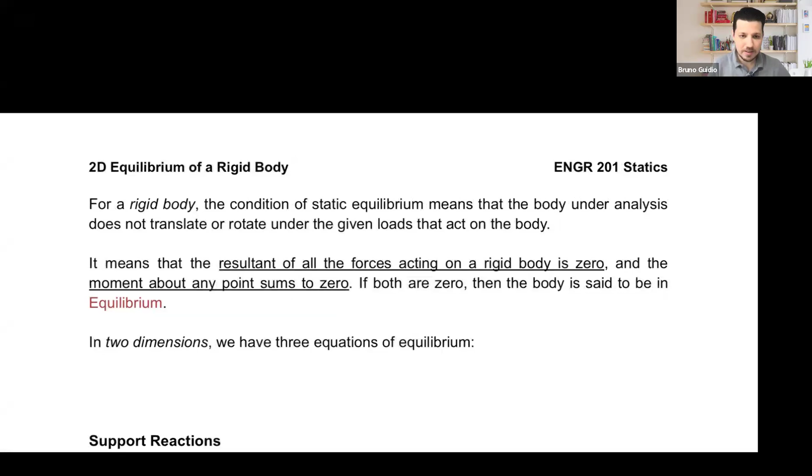Once again, this lecture is going to be on the midterm. This is an important lecture to wrap up the last two weeks that we have been together.

Okay guys, so we have been talking about 2-dimension, 3-dimension moments. Oh sorry, equilibrium.

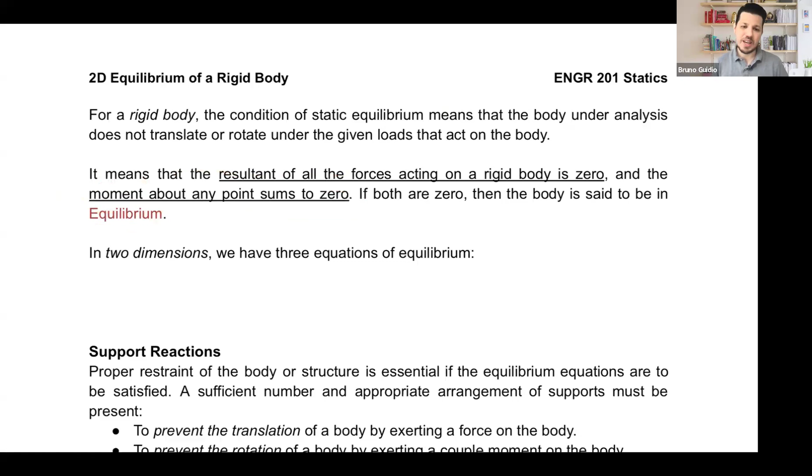And we're going to work with 2 dimensions—let's bring the equations back. Sum of the force in x should be 0. Sum of the force in y should be 0. Those are the two equations we have already worked with when talking about a particle. But now, what do we have? Sum of the moments about a point should be 0. Which point is this moment point, this point O? Any point—any point that I pick on my rigid body, once I calculate the moments, it should be 0.

Now, guys, before we start solving problems, think about this—I have this calculator right here. What's going to happen once I apply a force? If I don't have anything to hold it, once I apply the force, it's going to rotate. So I just said that to be in equilibrium there is no rotation, no translation, no force acting, no movement. So what I need to do is have some support, some grip here—something to hold this calculator. So once I apply the force, the calculator will not move.

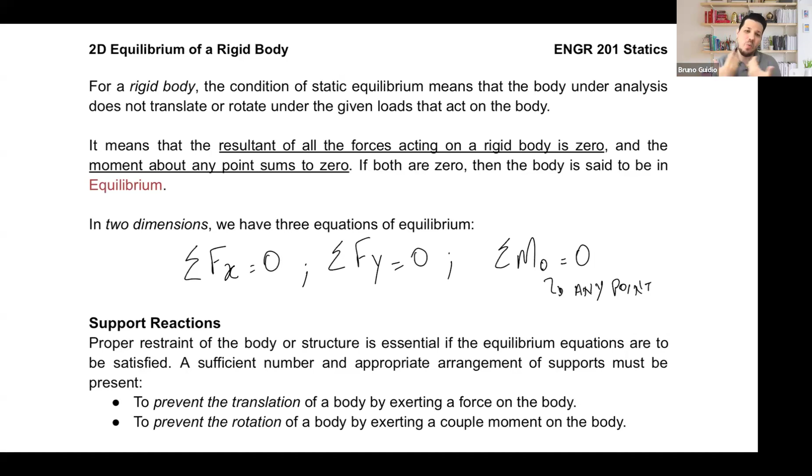And what are those legs? What do we call them? We call them supports. So for those equilibrium equations in 2 dimensions and the rigid body, 2 dimensions, 3 dimensions, we have what we call support.

And those supports, they're gonna cause some reactions. Action, reaction. If I have my weight on the table, the legs are gonna work, they're gonna react to my force. I put some force down, they're gonna react to it. I'm gonna put some force up. So it's gonna be kind of a fight, myself pushing it down and the legs pushing up. So that's what we have in those problems.

In order to maintain the equilibrium in 2 dimensions or 3 dimensions for a rigid body, we have some supports. For example, the beams. The beam is right there, and what's giving support to the beams? Most of the time, columns.

The airplane - what is giving the support to the airplane when he's down on the road on the airport? Well, the wheels. Same thing for cars. All right, so we have some support.

If I take, we're gonna have probably time to do a problem here. If I take a ball, a weight, and I'm holding this ball, why is it keeping my arm from going down? Well, it's the force that I'm doing, but who is doing this force? It's a reaction against the weight of the ball with my muscle - my arm here, muscle, tendon.

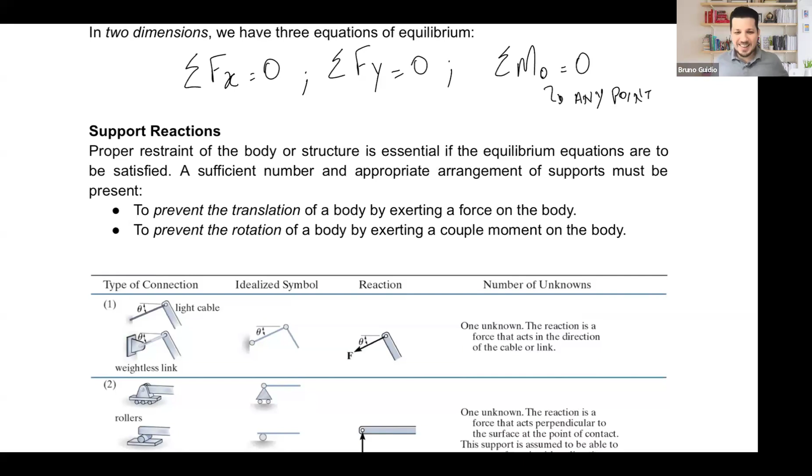So we have some reactions, support reactions, that we call support reactions. Depending on the support, they're gonna give different reactions. Some of the reactions are gonna prevent translation - prevent you from moving right, left, up, and down. Another is gonna prevent rotation - rotating clockwise, counterclockwise, both directions.

So our job when we start these kinds of problems today, first thing we need to figure out is what are the support reactions, or what kind of support I have, and which reactions that support will bring to the problem. For example, I have here a list of the most common ones that we're going to find. Let me go here with you.

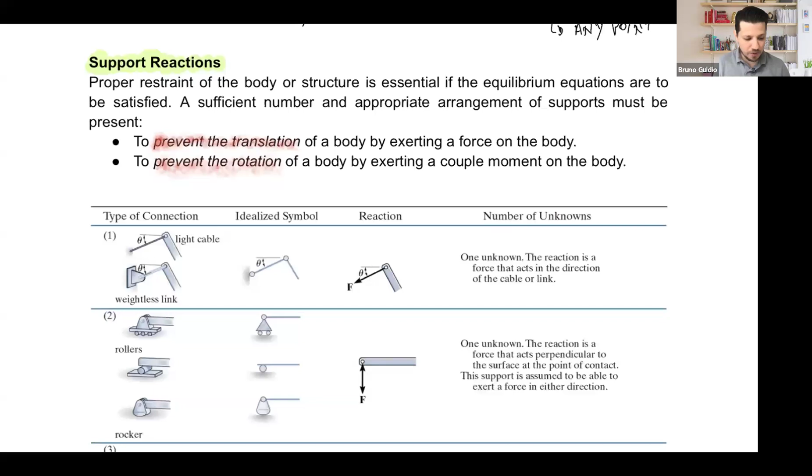This first one - sometimes we can have this light cable, or a link. And what are the reactions that we have? Well, we're gonna have a reaction right here. That link is just one unknown. The reaction is a force that acts in the direction of the cable or the link. That's pretty much what we had in the particles.

We have cables, and we call that reaction what? Tension. So the cables are gonna bring tension, and that's what we did. The tension here is gonna hold that one in order to not move. So that's pretty much what we did in particles.

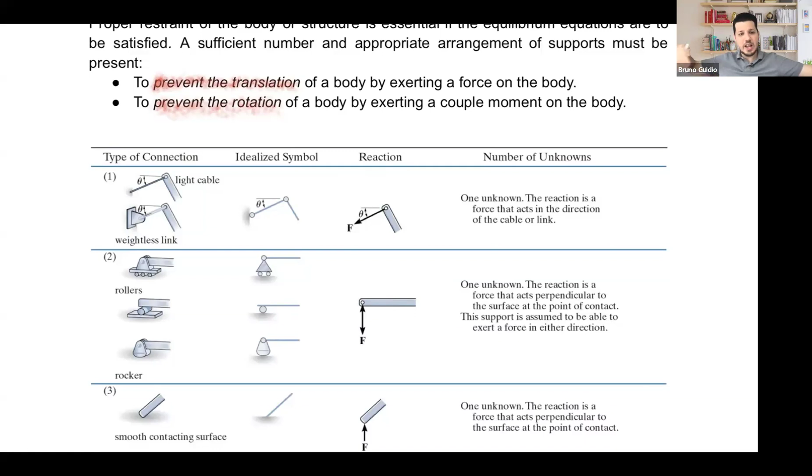However, we can have this in rigid body as well. We can have just cables holding a structure. For example, when you go to some structures, or other places, that is what - a structure being held by cables. That's common. We have cables, and those cables bring some reactions - they are doing some force.

Now, the second type of connection that we can have that's very common, especially for you guys who are civil engineering and mechanical engineers - rollers. Rollers is very common, and is one of the most common that we're gonna work with in this class. What is the roller, or rocker as well? Those bring one unknown, just one unknown, meaning we have just one reaction.

The reaction is a force that acts perpendicular to the surface at the point of contact. Meaning this roller is doing some force in order that the beam, or my body on top of it, will not move down. Sometimes also close, not moving up.

However, if I move right and left, this will move because there is no restriction in the x direction, left and right. The only restriction that we have is up and down. Think about this as a skateboard. We can move left and right, but the skateboard is still restricting the movement going down.

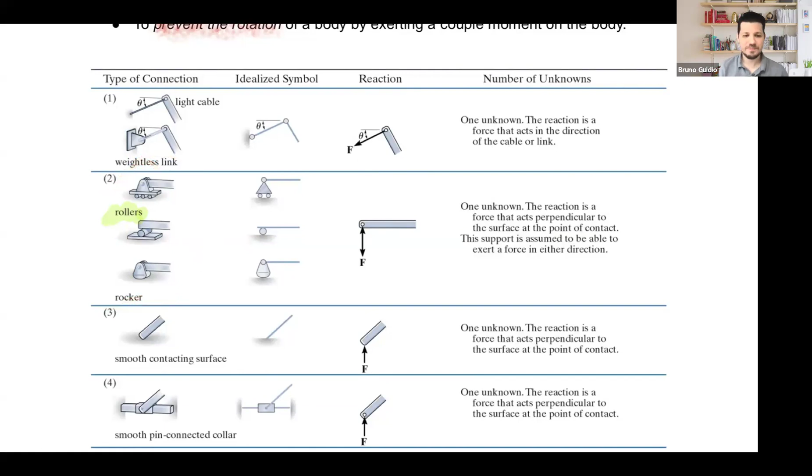Okay, so roller. I don't know if you pass this once you're driving around, you're on the 95 here. When you pass below under a bridge, take a look at the supports. Sometimes the older ones, you're going to see something like that. A few more, let's just go a little bit faster here.

We can have just the smooth contact surface, meaning it's just on the ground. The ground is giving the support. That's one unknown as well. And the last one we have here as well is the smooth pin connected collar.

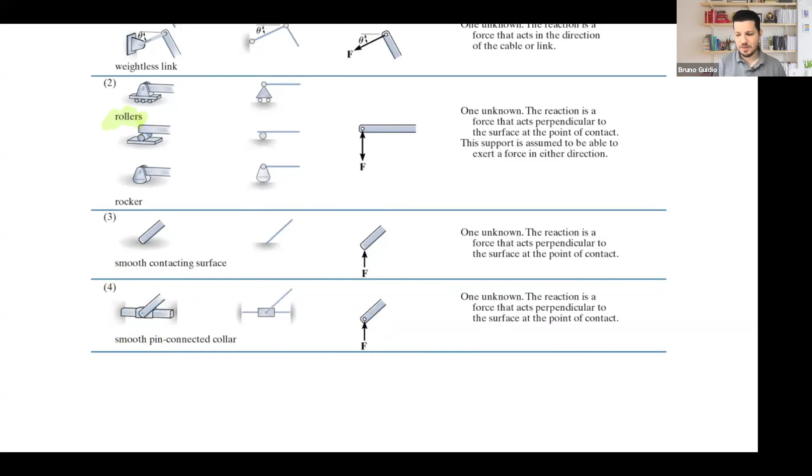This allows us once again to move left and right. It can move, it can rotate as well. However, this movement is restricted, so it gives us just one reaction. Those F here are the reactions — what the support is introducing to the problem.

So I didn't mention, but the roller once again can go left and right, and also can rotate. Think about this, my arm — I can rotate it, kind of a pin connection. Think about a pin, I have a bolt here. What happens with the bolt? The bolt, you can rotate as well.

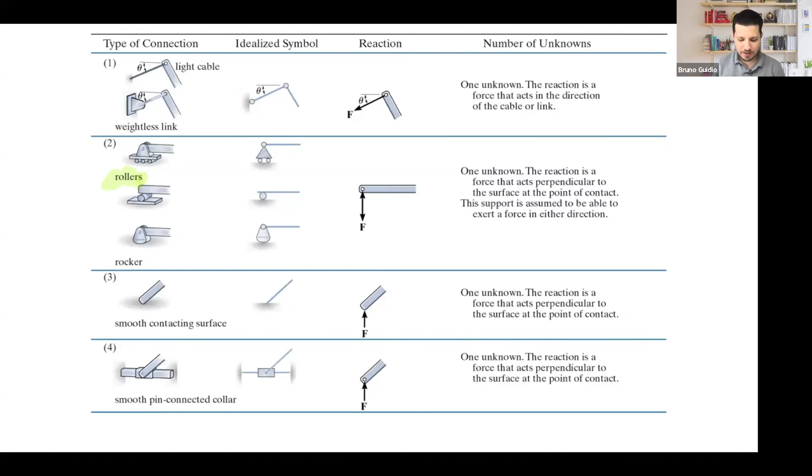This is the roller. Now what are others? I said about the pin just to show you the rotation for the roller, but what is a true pin connection is really this number 5, which is kind of a bolt. This is truly a bolt or a pin connection, because it can also rotate, but think about it — once we have the bolt, we cannot move left and right, we cannot move up and down. So this movement and this movement are restricted.

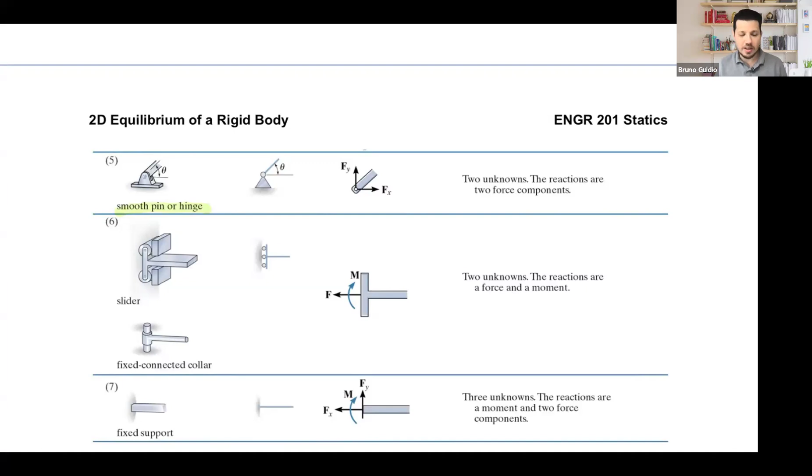If they are restricted, if I cannot move left and right or up and down, I have now two unknowns, two reactions. However, I can still rotate it. So this is also a very common one that we're going to use a lot in this class.

The last two here: first one, slider — or fixed connected collar. This is very common, probably in your house when you have a sliding door. I have here because of my background you're not going to be able to see, but what happens? Once you slide, you can slide left and right. If this is rotate, let's think about this rotate, but let's talk about this one.

You can slide this up and down for this one, but you cannot move like this because it's fixed here, and you cannot rotate — it will not rotate. So once we have those two, we have two reactions: one reaction is the force and one reaction is the moment. So can we have a moment reaction? Yes. If this does not allow us to rotate, then it's fighting against the moment, so it's reacting the moment — we have a moment reaction.

And then for finalizing, we have number 7, the fixed support. For those in civil engineering or mechanical engineering, you're going to see this as well — what we call a cantilever beam. Very common, a cantilever beam is just a beam fixed on the wall. For this one we have 3 reactions, because we cannot move left and right, and we cannot move up and down.

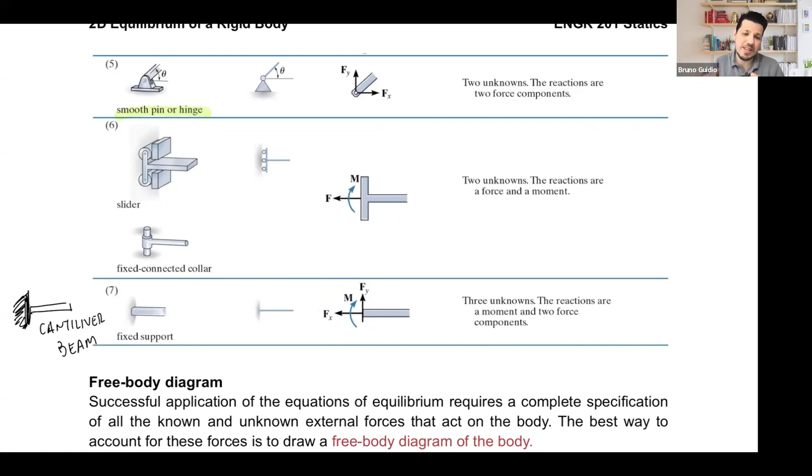So we're going to have three unknowns, meaning three reactions. So those supports are going to be important in our problems. Maybe you're confused a little bit right now, but we're going to solve some problems and figure it out. The supports are a big part of today's lecture.

I just want to state once again, we mentioned free body diagram already, but most of the time, in order to visualize what the supports are doing and what they're bringing to the table, it's a good idea to draw the free body diagram, so you can remove all the noise and just put there the reactions, the force, and see what we can do to solve the problem. Sometimes we're also able to break the problem into components, so we can find reactions in different ways. So free body diagram is very important for us on these problems.

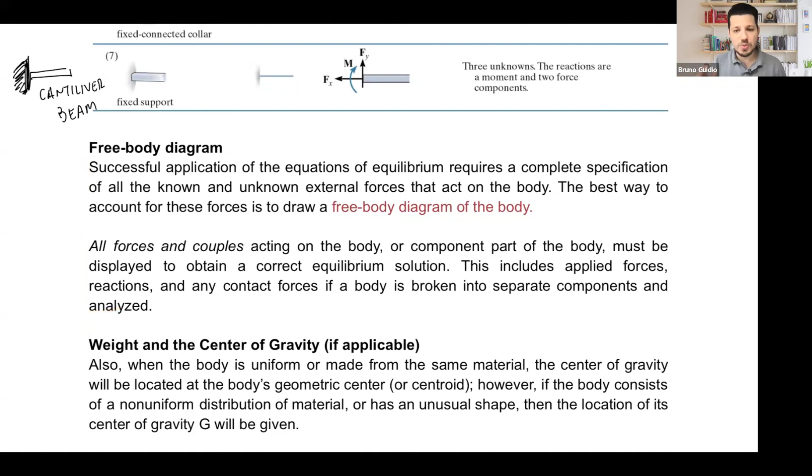And to finalize, I just want to mention weight and center of gravity. When the body is uniform or made from the same material, the center of gravity will be located at the body's geometric center.

Meaning, in some problems we're going to work, let's say this is a box, and that box is going to have a weight, the same way we mentioned in a few problems, a few lectures ago, we have weight of the objects. Some of the problems are going to ask us to consider the weight, and what are we going to do? We're going to apply that weight. Now it's not going to just one point, it's a body, it's a box, it's a car. We're going to apply that weight at the center of gravity.

This point G - if it is uniform material, it's going to be right in the middle, right where the body's geometric center is. If it is an unusual shape, the location of this G point is going to be given to you. But you know that all my weight will be applied on that center of gravity with respect to equilibrium equations.

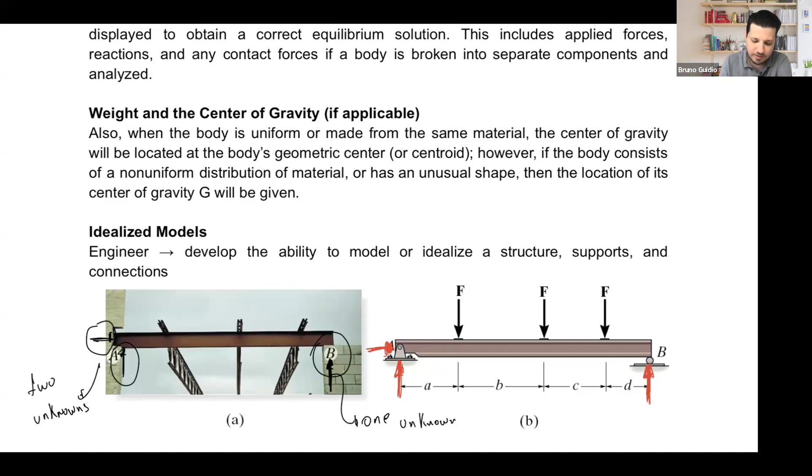But once we take a look at this one here, my beam is also on top of a wall. But looking here, we have this part that's not going to allow the beam to move to the left, so it's going to give some support here and here. We're going to have two unknowns, right there.

So what we are doing is idealizing those supports. We idealize that this is going to be a pin connection, and we idealize that B is going to be a roller connection in order to analyze the problem. So that's what we do - we idealize models. Same for those trusses.

We are going to learn that those trusses are putting some force here - force, force, force. So what am I going to do? And this is the structure that I'm going to analyze, what's happening with this structure. But in reality, where is this coming from? It's coming from a situation like this.

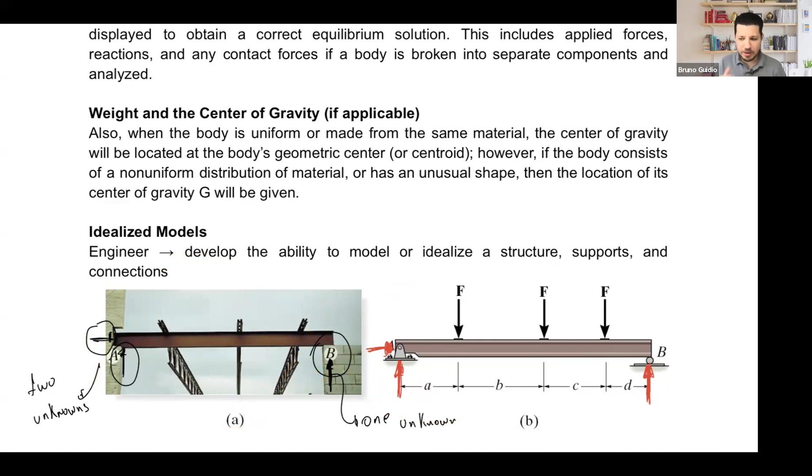So just to show you that, I'm going to show you some drawings, but there's always some link with a real problem. It's not like we just throw some problem out there - there is a link. We analyze models, there is a link in how we are doing this with real world problems. Because sometimes you're not going to see those kinds of figures, but once you see these, it's just the idealized problem. Let's jump to the problems, put numbers, and maybe it's going to be easier to follow.

Let's solve together problem number 1. Let's see what's going on here. Any questions so far?

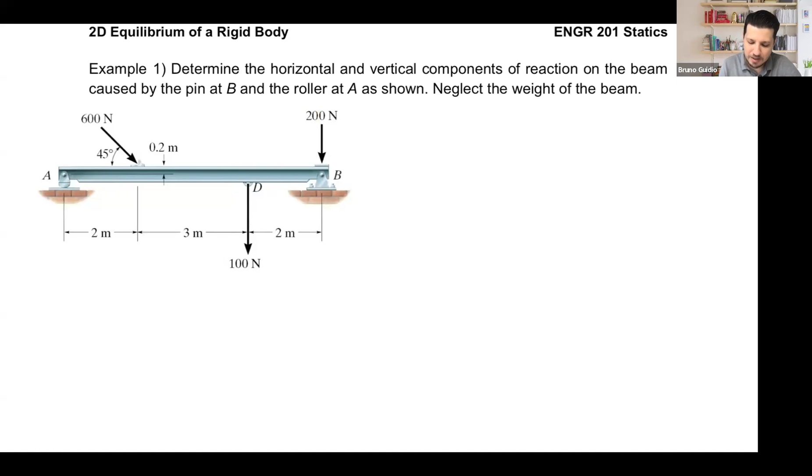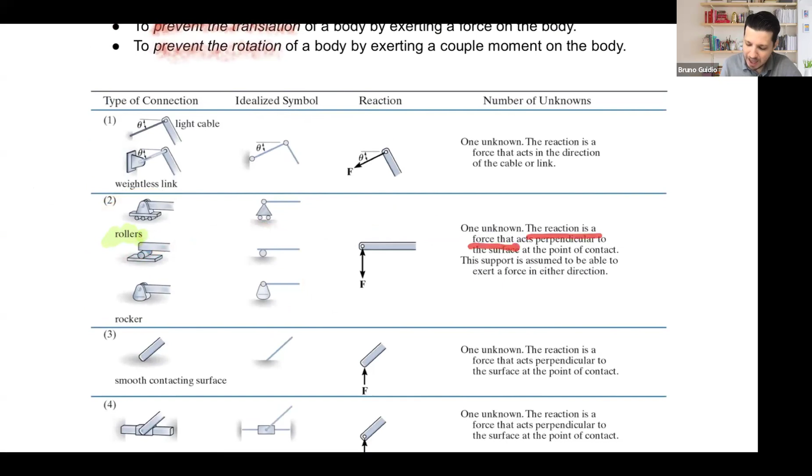Now let me take a look at the supports, because it was mentioned that A is a roller. Rollers give one reaction, and the reaction is a force that acts perpendicular to the surface. So this reaction right here, let's say AY.

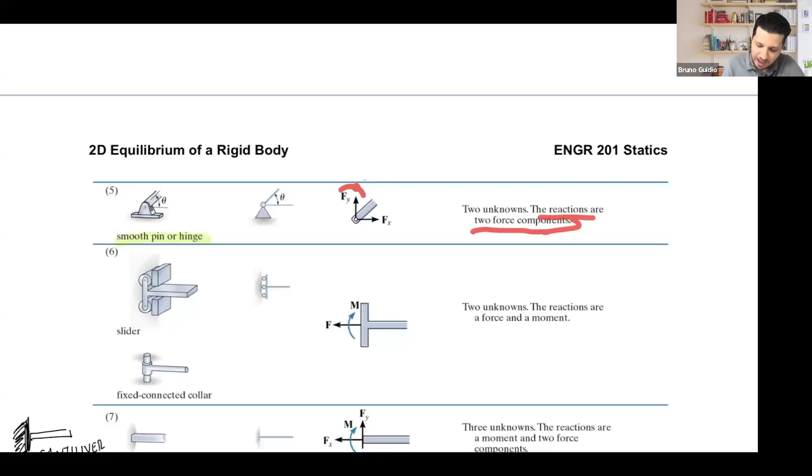And B is a pin. A pin right here is a smooth pin, with two unknowns. The reaction are two force components, Fx and Fy. So right here, perpendicular to the surface, By, and right here, Bx.

Actually, let me put it like this. Sometimes the students get confused. So let me put the Bx here, positive, going to the right. All right, so it looks like I have this kind of problem.

So let me write the free body diagram. Let's see what's going on here. The free body diagram will show me the following: I have 200 Newtons, and right here, 100 Newtons.

I have 2 meters here, 3 meters between those forces, and I have AY, BY, BX. It was given that the thickness of this beam is 0.2 meters. And of course I didn't put it here, but let me put it here, I have the components of this force.

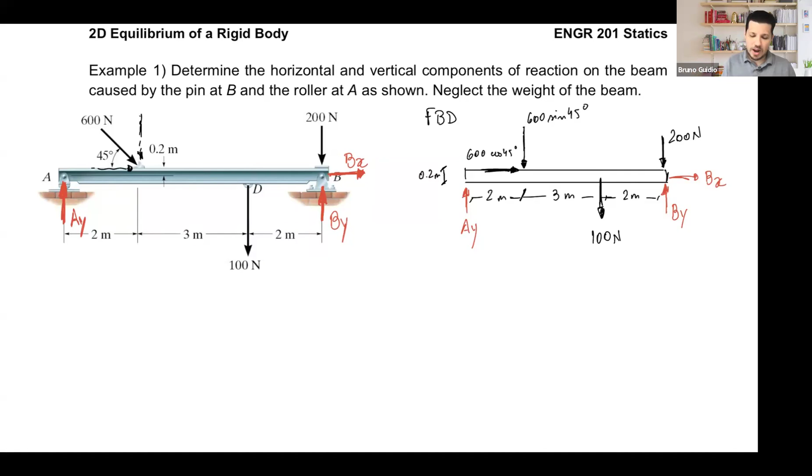Okay, and now I have 3 unknowns. And pretty much for equilibrium equations, I'm looking for the value of the unknowns. What should be the support reaction so that this body is in equilibrium? So what I'm going to bring to the table? Well, I'm going to bring my equations of equilibrium.

And what is the first equation of equilibrium that we can use? Sum of the force in X should be 0. And remember, to the right is positive. Now, sum of the force in X should be 0. Now we are talking about equilibrium, guys. We're not just summing the forces as you did in the last homework. We're not just summing the moments. We want them to be 0.

So sum of the force in X should be 0. What do we have in X? In X, if you agree, we have positive 600 cosine 45 and positive BX, because going to the right is positive. Okay, by my calculation here, BX is going to be negative 424.26 Newtons.

Bruno, I got a negative value. What does it mean? When you get a negative value for reactions, it means that the direction that you considered is wrong, it's the opposite direction. Meaning that BX is not acting to the right, BX is acting to the left.

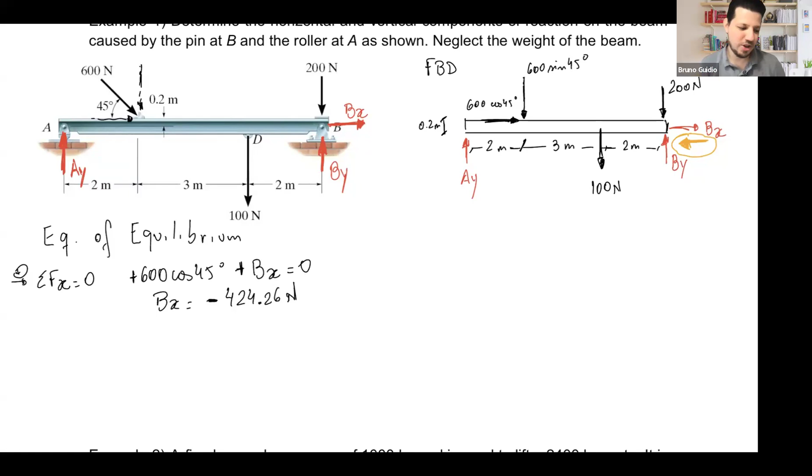Bruno, how am I sure that this is going to the left? Well, take a look at these four other forces that we have. 600 cosine of 45, this is pushing our beam to the right. But to maintain equilibrium, what does the pin connection at B have to do? Fight back, push to the left. So this is going to the left, for sure.

All right, so next equation of equilibrium: sum of the forces in Y should be 0. We know that up is positive. Let's see what we have: AY going up, positive AY. Negative 600 sine 45. Negative 100. Negative 200. And positive BY equal to 0.

Okay, what are we going to have? AY, negative 424.26, negative 100, negative 200, plus BY. At the end, AY plus BY equals 724.26. So right now I cannot solve. I have an equation, AY plus BY equals 724. All right, let's keep this right there.

Okay, let's move to the third equation, the new one here: sum of the moments equal to 0. Moment about any point, I can take the moment about A, about D, about B. Doesn't matter. Any point you pick, you can take the moment. However, let me tell you, the best points to pick are always one of the reactions, where we have the reactions. In that case, A or B.

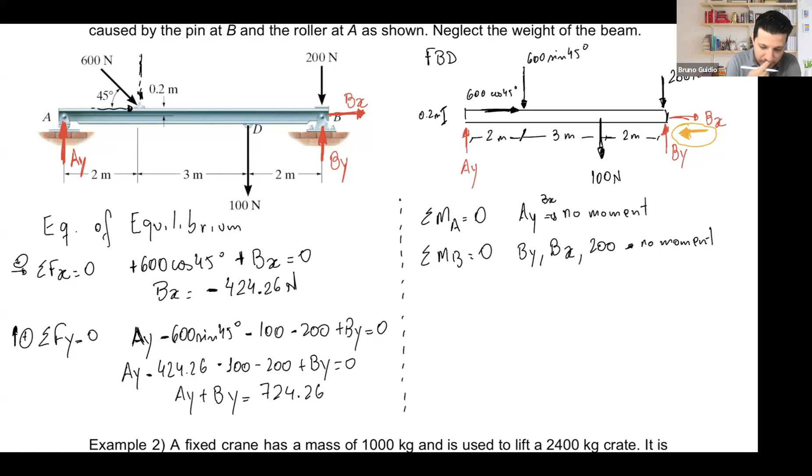All right, so for this one you could pick any of those 2 points. It's gonna work fine. Let me, because it's already here, let me take the moment about B. It was the last one that I wrote. So for example, let's see, guys, this was the homework. Is AY doing moment about B? Yes, moment about B, yes.

What is the distance between the line of action of AY and point B? All of these is 2, 3, 2, 5, 7. So it's AY times 7. Now, positive or negative moment, rotating about B clockwise, negative.

Is 600 sine 45 doing any moment about B? Yes. Line of action to the point, 5. 600 sine 45 times 5. Positive or negative? Counterclockwise, positive.

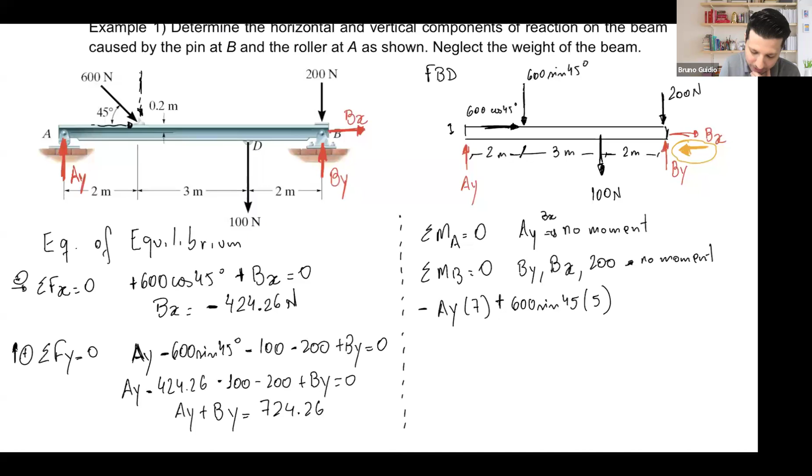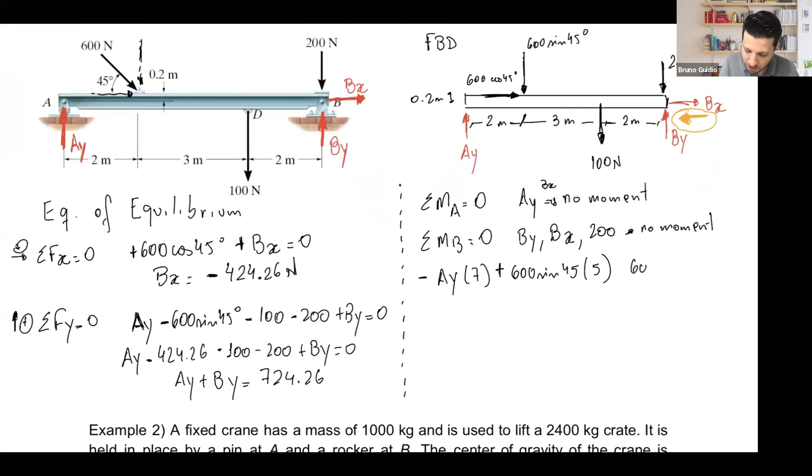Is 600 cosine of 45 doing any moment about B? Yes, because the line of action is here, the point is down. And actually, sorry, this is not the thickness, it's just half point, 0.2 meters. I don't know if you can see here, but this is just half of it, 0.2 meters. So this is going to be 600 cosine 45 times 0.2. Then positive or negative? Well, it's trying to rotate like this, this point B, rotate like this. Clockwise is negative.

And my last one, 100, line of action to the point, 2 meters. Counterclockwise, positive, 100 times 2. Okay, now we have to do this calculation. Let me do negative 7AY. Let me see if I have here. This is 600 sine 45 times 5.

Positive 2,121.32 negative, 84.85, and positive 200 equal to 0. Negative 7 AY is positive 2,236.47 equal to 0. AY is negative 2,200 divided by negative 7. AY is 319.5 newtons. That's my answer.

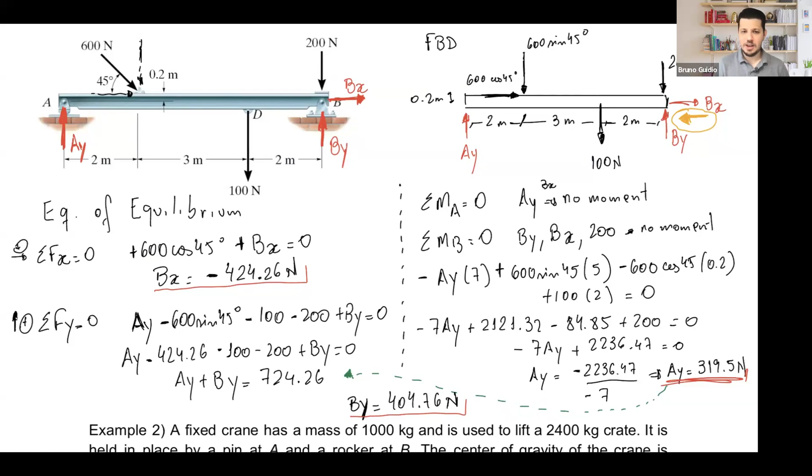Okay, I have here, I think, 5 problems. So let's try to solve all of them. Again, guys, this topic will be in the midterm. Okay, so please, if you have questions, ask me. Please ask me if you have questions throughout all the problems.

Equilibrium of a rigid body. Starting example number 2. A crane has a mass of 1,000 kilograms. It's used to lift a 2,400 kilogram crate, held in place by a pin at A, a rocker at B, center of gravity at G. We need to find the components of the reactions at A and B.

Let me draw my free body diagram, right here on the bottom. Free body diagram. I have something like this... something like this. Come on, bro. Start again. Great, okay, I have something like that.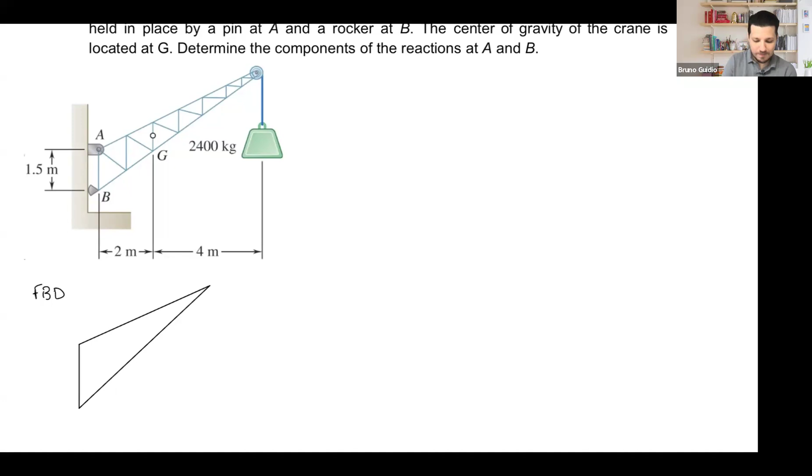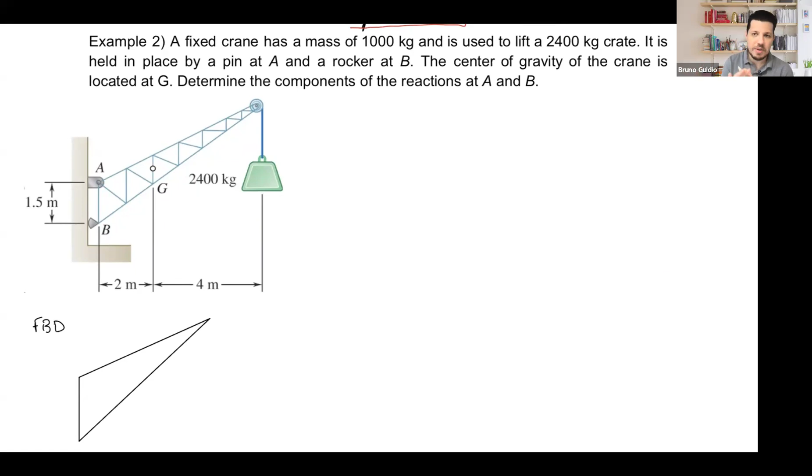It was said that I have 1,000 kilograms as the mass of the crane. And as I said, the mass of the crane is the mass of the body. It's going to be applied at the center of gravity, G, so right here. I don't have the mass of the crane, what I have is the weight of the crane. That's different, let's already calculate this.

1,000 times 9.81. All right, here, okay, this box is the crate. I don't have the mass of 2,400, what I have is the weight of it, which is 2,400 times 9.81, 23,544 newtons.

All right, what else? Well, I know that this one here is 2 meters. This one here, 4 meters. And reactions: I have a pin at A. If it is a pin, okay, I have one reaction AX, another reaction AY. If B is a rocker, I have just one reaction BX.

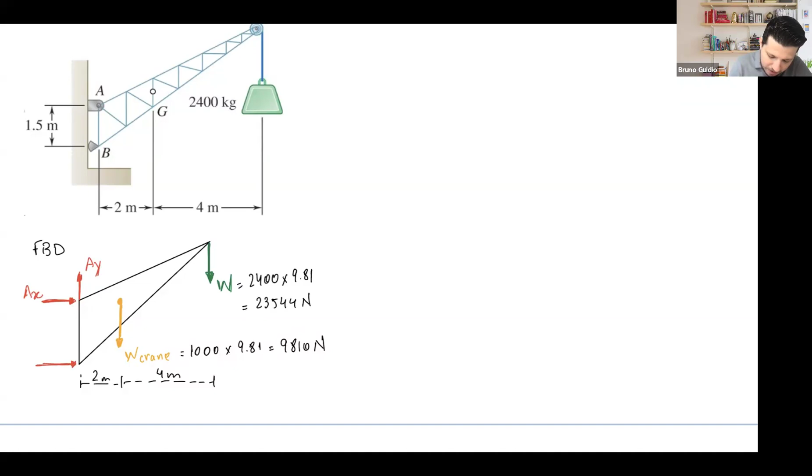Bruno, why is it not BY? Because even though it's one reaction, it's perpendicular to the surface, okay, perpendicular to the surface. And this surface is vertical, so the reaction is a horizontal reaction. Okay, so it depends on the orientation of your support. Keep in mind, it depends on the orientation of your support. And this is 1.5 meters.

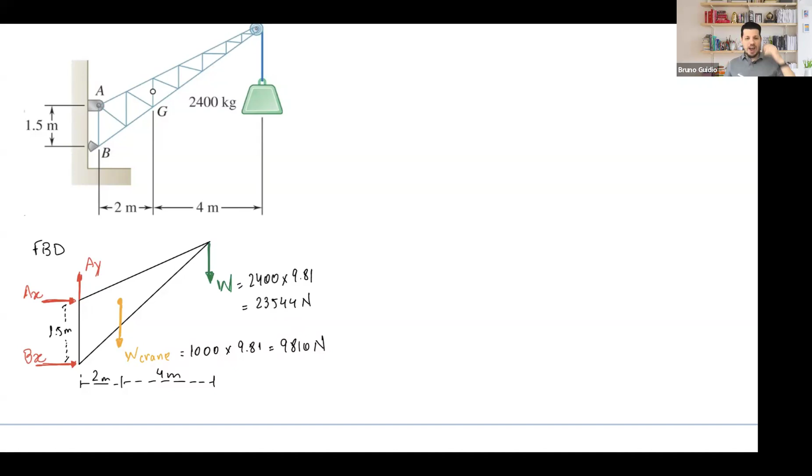All right, so this is my free body diagram, this is what we have. So let's start solving it. Let's bring the first equation of equilibrium: sum of the forces in X should be 0, positive going to the right. Let me write this once again. What do we have? AX, BX, and well, that's it. AX, BX. At the end, AX is negative BX. I don't know, that's the only thing that I know so far.

Let's go to the other one. Sum of the forces in Y should be 0, going up positive. What do I have? AY positive going up, negative weight of the crane, negative W equal to 0. AY negative 9,000, negative 23,000 equal to 0. At the end, this is straightforward: 33,354 newtons.

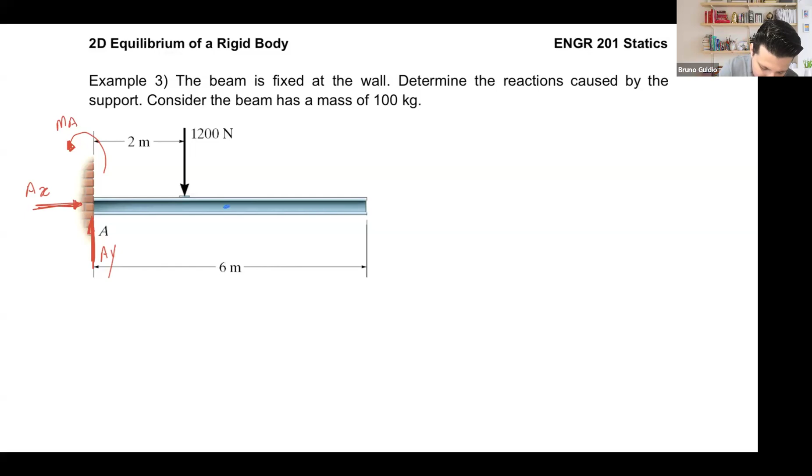This is a regular shape, and the blue dot is the center of gravity. In most cases, right here in the middle, we have this weight of the beam. Let me draw the free body diagram.

Let's visualize. We're going to have this beam right here. We're going to have AY, AX, and MA.

We have a force here, 1200 newtons, at 2 meters. We're going to have this weight, which is 100 times 9.81, which is 981 newtons. This is the distance, 3 meters. This is 2 meters right here. Simple, that's the force that I have.

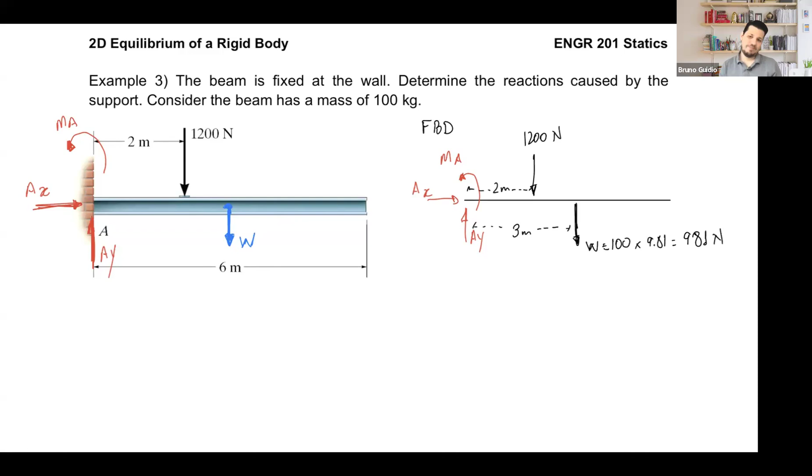Just want to introduce to you the fixed support. So how do we solve it? Sum of the force in X should be 0.

What do we have in X, guys? Well, I only see AX. AX equals 0, so I have no reaction. I don't have any other external force acting on the beam.

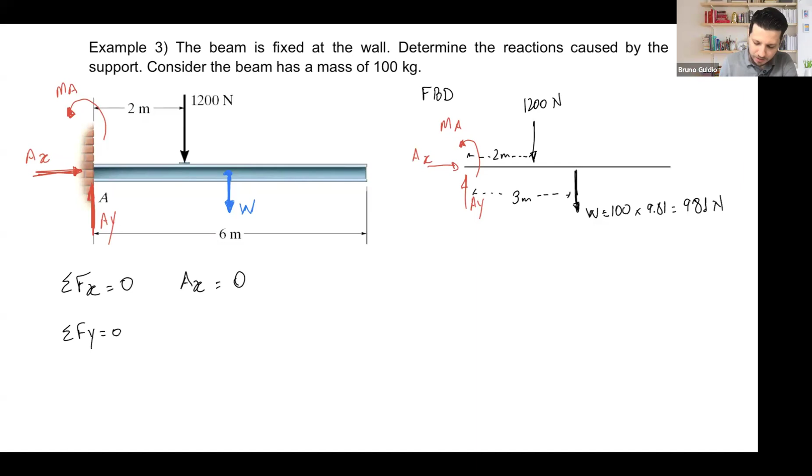Sum of the force in Y should be 0. What do I have in Y? AY going up, positive; 1200 going down; and going down, 981. Equal to 0. Once I calculate AY, I get 2181 newtons.

What's going to be a little bit different is the moment about A. Sum of the moments about A. Now, is AY doing any moment about A? No, point A is here. Is AX doing any moment about A? No.

What about moment A? Is moment A doing any moment at A? Yes, it's a moment, it's rotating that body. Remember what we call this, a concentrated moment? This sign here, it's already a moment, and moment has no distance. Moment is rotating that point. The way that I drew it is counterclockwise. Counterclockwise is positive MA, it's my moment reaction.

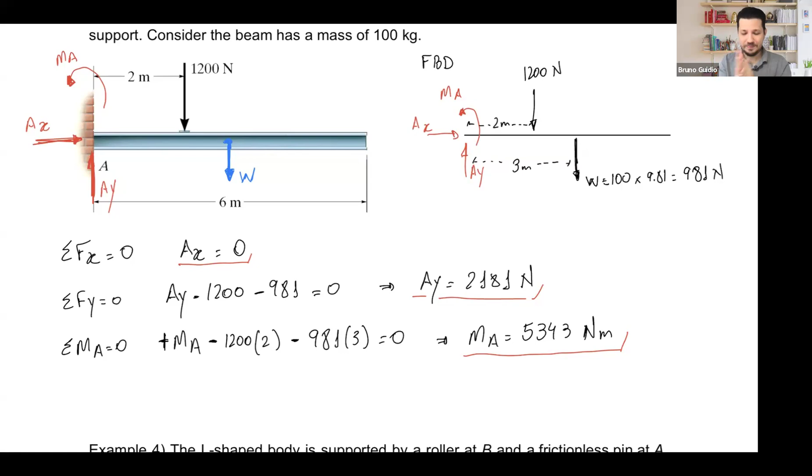Okay, problem number 4. Let's keep going. A lot of problems here I want to bring today, so you get all different case scenarios to get ready for exam, homework as well. Different problems that we can find in real life.

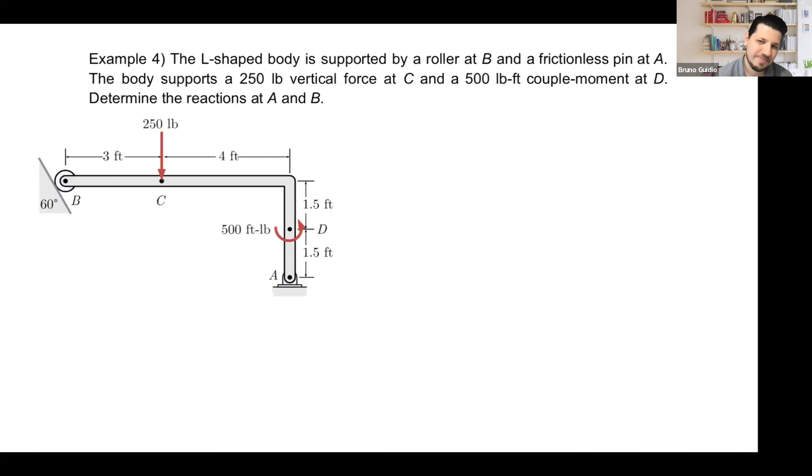For example, this one's new, a little bit different. The L-shaped body is supported by the roller at B. Look, what do we have? B over there is inclined, and we have a pin at A, pin support. We have 250 pounds vertical force at C and a 500 pound-foot couple moment. So we have a couple moment over there. We already discussed couple moment.

Find the reaction at A and B. Okay, I'll start, just giving time if you're copying it.

Let's discuss first the problem, the reactions. First, A is a pin. Let me use another color because red is for the external force, so let me use blue. AY, AX. Pin support, AY, AY, AX.

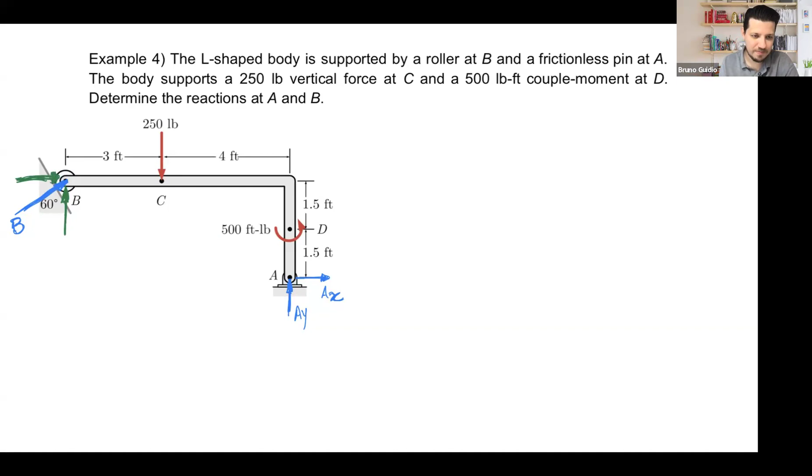Bruno, but components of reactions? Yes. If the reaction is inclined, in order for me to solve the equations of equilibrium, I need to find the components of those reactions. So I need to find which one is going to be B cosine and B sine. And this, the way that the problem is set up here with the angle, is a little bit tricky, but let's see if we can get through it.

To visualize, sometimes it's easier to visualize the angle, which one is going to be sine, which one is going to be cosine. So what I'm going to do is the following. This is a little bit tricky, let me explain to you. Take a look, this is X, this is Y.

You can have this cut, X is cut at the same inclination as this guy here. Meaning that if you agree, this 60-degree, by the way, is this angle here. I think it's not that clear, but this angle is 60 degrees. So let me put the other pink one. Pink, 60 degrees. So the 60 degrees is right here. Where's my B? My B is right here. If this is 60 degrees, this is 60 degrees. This is 60 degrees. And this is 60 degrees.

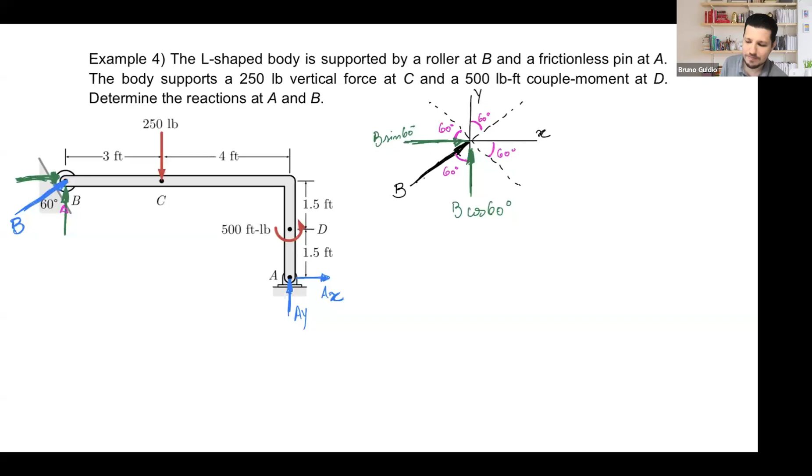So we know that one is B. Now one is B cosine. Another one is B sine. Pay attention, I'm not writing Bx sine, By cosine, because they're coming from B. Just one reaction, just one value. The resultant is B. So B cosine, B sine, B cosine, B sine.

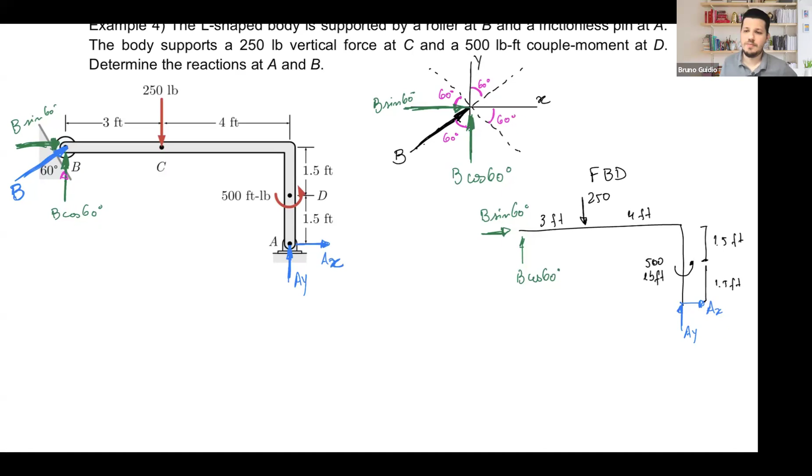Should I draw the free body diagram here? Just for the sake of drawing, I already drew everything over there. So right here, what do we have now? We have B sine, B cosine, 3, then we have 250, and then 4, and then 1.5, and 1.5. We have AX, AY. And then finally, almost forgot, a concentrated moment of 500 pound-feet. Okay, that's everything that I have.

So let's calculate here. Let me see if I can put it here. Sum of the forces in X should be 0. What do I have in X? I have positive B sine, positive AX, equal to 0. Well, right now, I cannot solve this equation.

So let me go to the other one. Sum of the forces in Y. I have B cosine positive. I have negative 250. And I have positive AY equal to 0. Right now, I cannot solve it. I don't know B, I don't know AY.

So let's see if the third equation can help me. Sum the moments about a point. Which point? Well, if I take moment about... take a look, if I take moment about B, this is not going to have moment, this is not going to have moment. But AX and AY will cause moment about B, because this is line of action, this is line of action. So I'm going to have two unknowns, not going to be able to solve it. Then I have a system of equations.

However, if I take the moment about A, AX and AY are not going to cause any moment. And those two, they are just B, B. So I can find B over there. So I'm going to take the moment about A. Take the moment about A, see if you guys agree. B sine 60 degrees times 3.

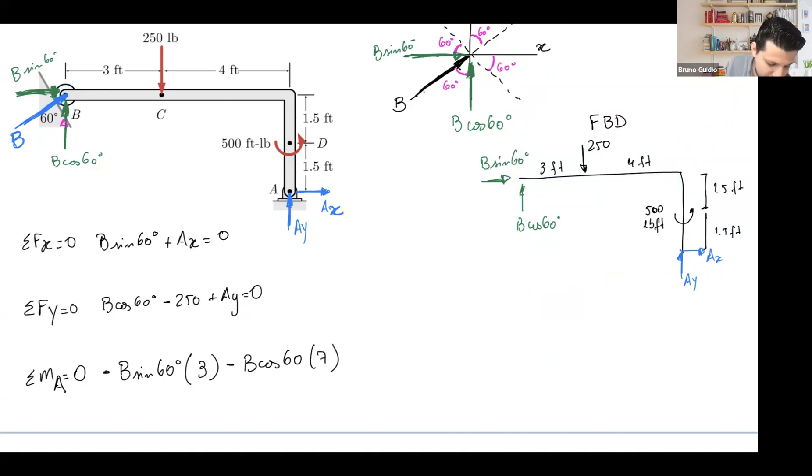250 times 4. Oh, I already put the positive, but counterclockwise.

And then we cannot forget about the couple moment. Remember, couple moment is already rotating the body. Rotating where? Counterclockwise. So this is a positive 500. No distance, because it's already a moment, already a moment. AX and AY have no moment at all. So this is it.

Once you calculate this, sum of B together, blah, blah, you're gonna get B equal to 245.9 pounds. Try to do this calculation here, guys. You have two B's, use some B's, and then go to the other side, divide. See if you can get this value.

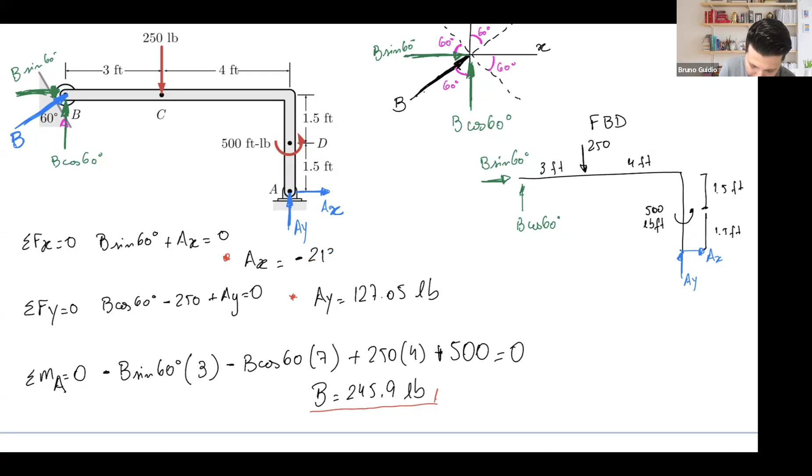With that, of course, we come here and solve. We're gonna find AY equal to 127.05. And then we go back there and solve as well. We're gonna find AX negative 213 pounds.

So the only thing here is AX should be going this way, to this way. Again, I skip the calculation. Please do the calculation by yourself. See if you can get the answers. That's important, guys, that's important.

So this B that I found is truly the reaction B, right here. B sine, B cosine are just the components of that reaction. So right here I have 245.9.

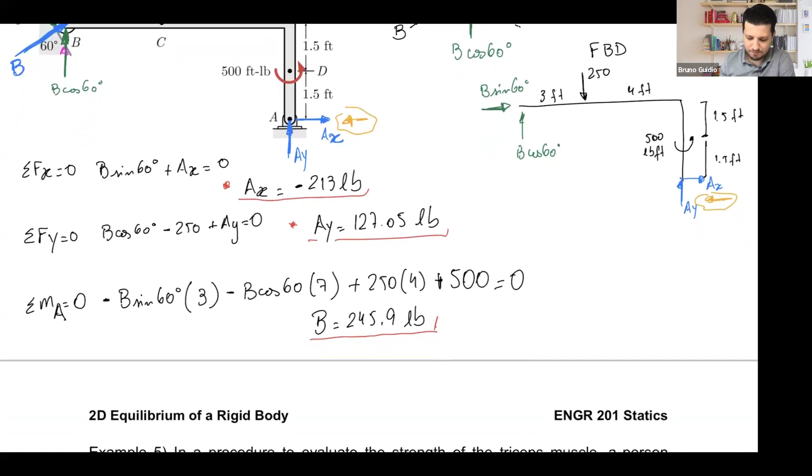All good? Any questions? Any questions? Okay.

Okay, moving. Problem number 5.

Problem number 5. A procedure to evaluate the strength of a triceps muscle. A person pushes down on a load cell with the palm of his hand as indicated in the figure. If the load cell reads 160 newtons, determine the vertical tensile force F generated by the triceps muscle. The mass of the lower arm is 1.5 kilograms, with mass center at G.

So we have... I want to find the vertical tensile force F of the triceps. What is the triceps? The triceps is right here.

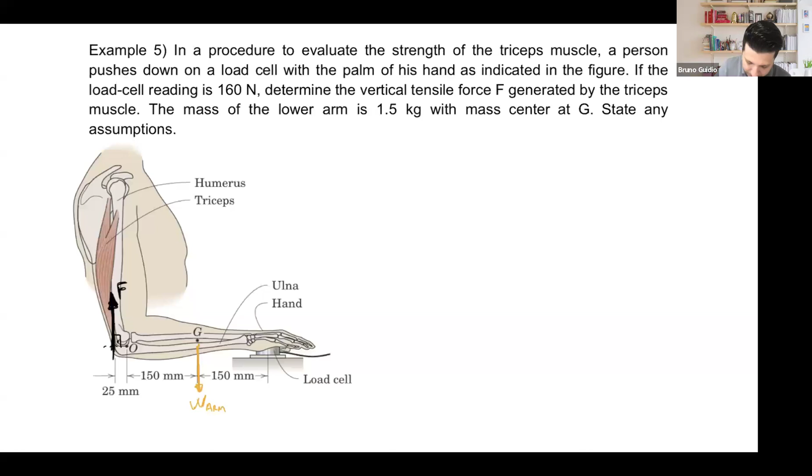This is a force. This is a support. This is a little bit different - this is a support applying the force, that is a support. So we know that what we have going down is like a normal force. It's resting on the ground, it's a normal.

160 newtons. Okay, we have this normal force.

So this is my loads that I have. So let's find the free body diagram. Let's take a moment about O. Let's consider this O because all the dimensions go to O. So this is O, and first we have a force F that I want to find.

Let's say these are millimeters, so let me move to meters: 0.025 meters. Right here I have 0.15, at G, and right here...

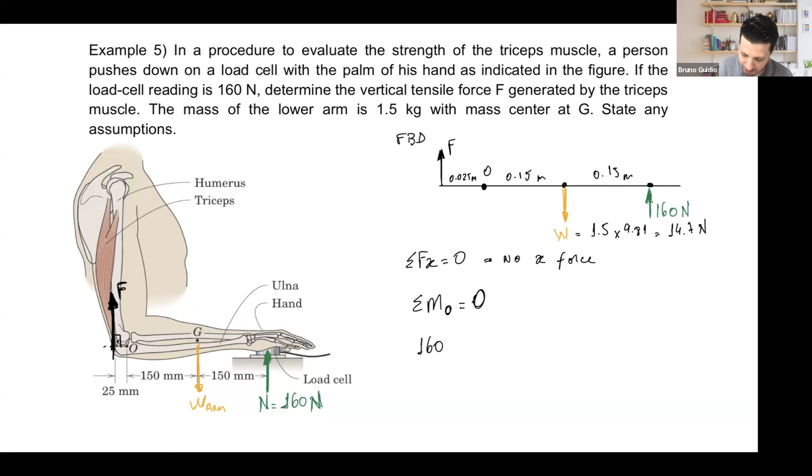Then I have my 160 force, positive, times 0.3. I have my negative 14.7 times 0.15. And also I have my force, negative 0.025. This is for the force acting on the triceps.

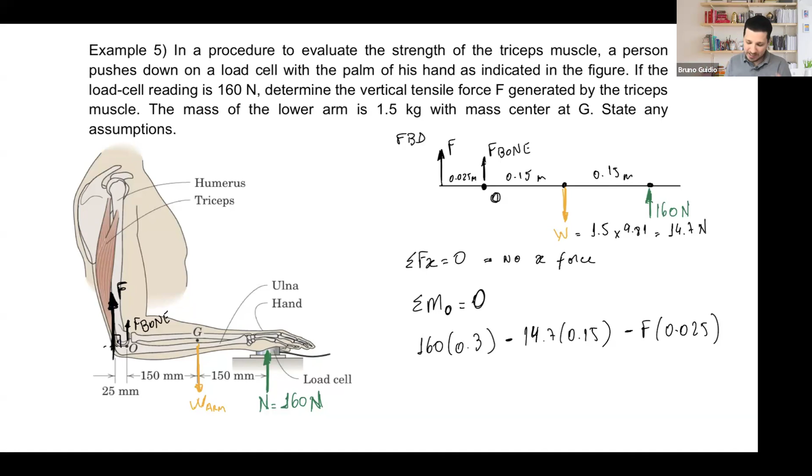I forgot to mention we have the bone here as well, and of course we're going to have some force here at the bone, force bone. But for the assumption here, we want to find just the force on the triceps. That's what I forgot, sorry about that. Because I want to find the force on the triceps only for this problem, that would be sum of the moments about O, where the bone is. So that's what I forgot, I'm sorry. So this should be 0.

So let's take a step back. My mistake here. We have the force of the triceps, we have the force at the bone as well, we have the W, the weight, and we have this force here pushing this loading cell.

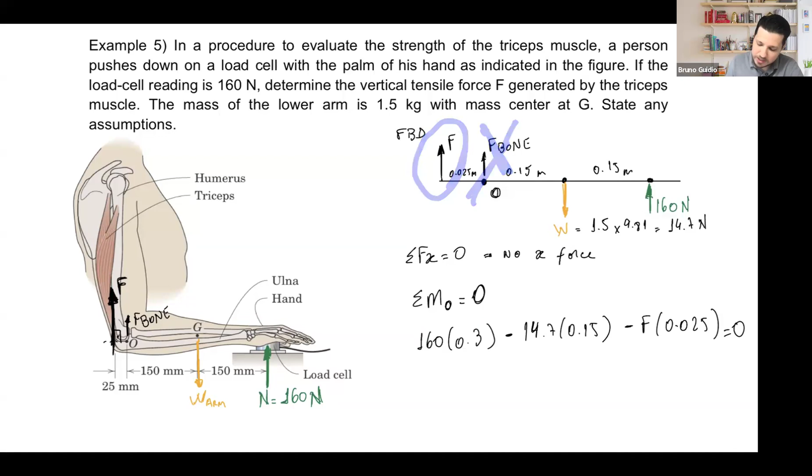With that in mind, take the moment about O, because we don't want to know about the force at the bone. The question is just asking for the force at the triceps. So for a moment about O, there is no moment caused by the bone. Then I can come here and solve this problem. Let me solve it together.

160 times 0.3 is going to be 48. This is 14.7 times 0.15, this is 2.205. And this is negative 0.025 times F. This is 48 minus that, 45. Go to the other side: F is 45.795 divided by 0.025.

Now I see the answer. F is 1831.8 newtons. That's the answer, that's the force on the triceps. So I have the force on the triceps, 1831.8 newtons, that's the force I was looking for.

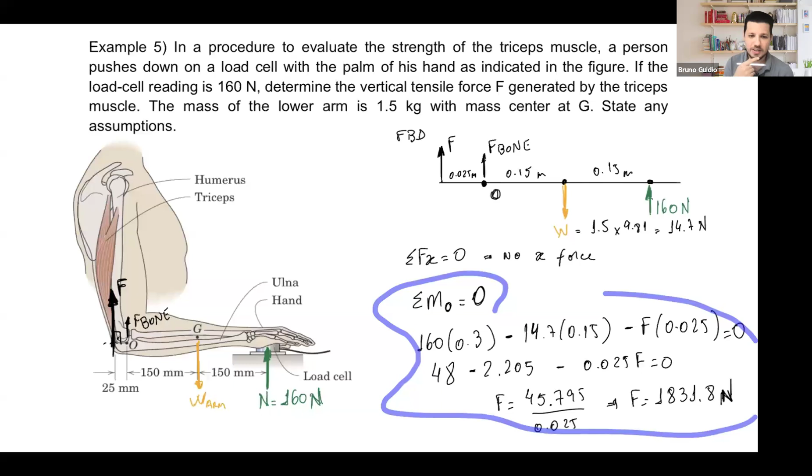So this is just solving the equation regarding the moment about O, and then I can calculate the triceps. In this specific case, we're able to just solve using the moment. Here I just came and solved the moment. Some problems need the three full equations because we have others to find. So it's always good to visualize different aspects of different problems.

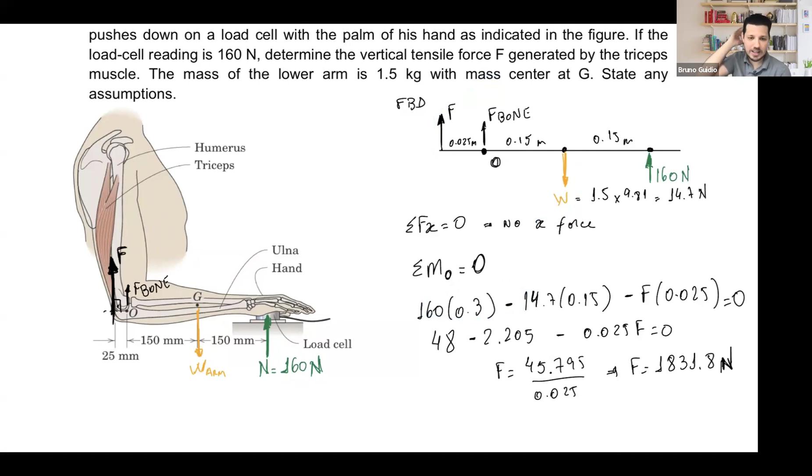But here once again, simple problem: distance, distance, and force, and being able to do the moment. I think moment is the most important concept, especially since last week it's been very important. So this is problem number 5, any questions?

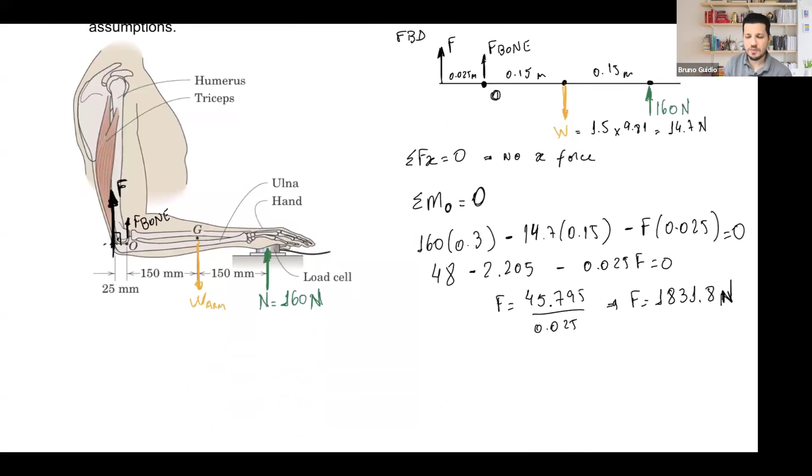Now we have another problem to finish the class today, problem number 6, which is a little bit different. We're talking about an airplane. I took these problems from the book, asking a little thing different, a little more. I'm going to do it, but really what I want you to be able to find is the reactions. So let's go for the last problem, we have time.

During an engine test on the ground, a propeller thrust of 3,000 newtons is generated on an 1,800 kilogram airplane, mass center at G. The main wheels at B are locked, do not skid. So with that information, I know BY and BX. The small tail wheel at A has no brake, meaning that support is free to move with no brake, AY.

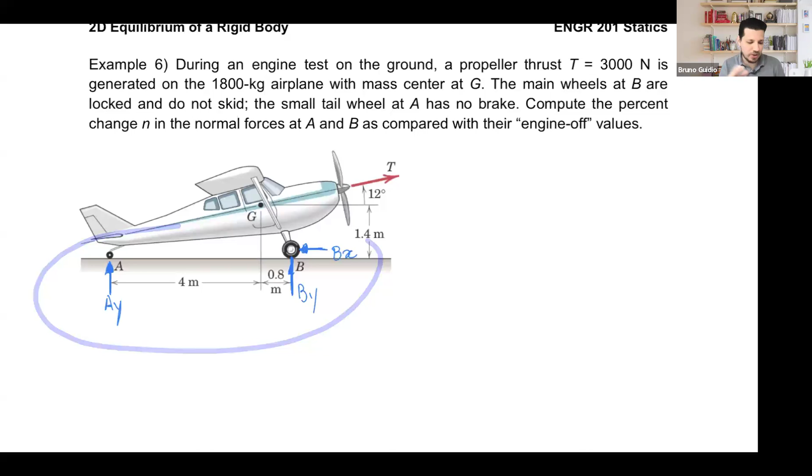Compute, then what they ask is a little bit different, but what I want to know is those reactions. Later I'm going to solve, as the book said, compute the percentage change in normal force A and B as compared with the engine off values. Meaning let's do two cases: one where we have T acting, another where the engine is off, meaning no T, just the airplane by itself. How much should be that reaction? And once we have this T, how much is going to be those reactions? That's it, two cases, off and on.

Engine off, engine on. Let me start with engine off, a little bit easy. How should be my problem? Something very simple like this: I have the airplane, let's put just this line here, the airplane, and let's say I have this here as my wheel, and this is my other wheel.

Something like that. What I have is AY, I have BY, and at the wheel I have BX. Right here I have this W, that's the weight. And that's it, what are those distances? From here to W I have 4, W to this I have 0.8, and if needed, this distance here up to there is 1.4 meters.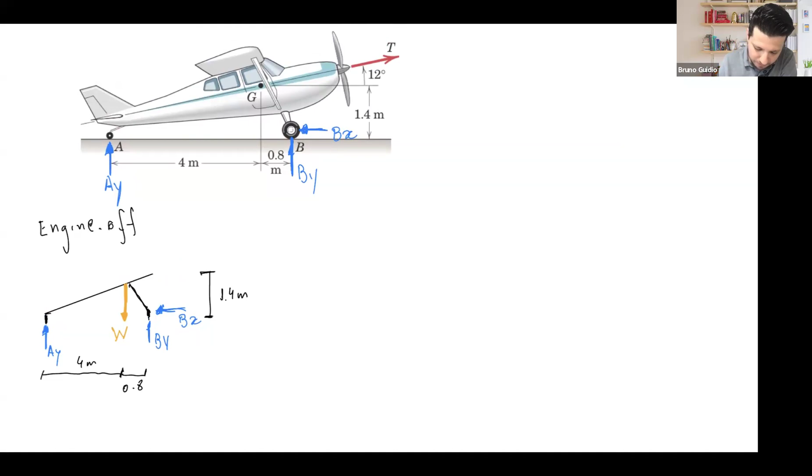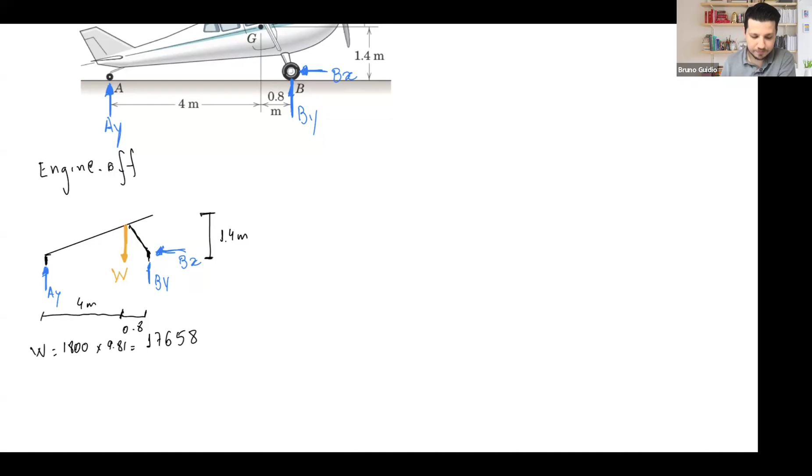Now for the engine off, that's it, I don't have T. Let me reduce this one, I don't have T. And with the engine off, of course, let's calculate this W and put it here. W is 18, so W is going to be 1800 times 9.81, which is 17,658. Okay, that's the weight.

Coming, should I do it side by side? Oh, it's okay if I do it here. Sum of the force in X should be 0. What I have next: BX equals 0, so no reaction at all. And what I have in Y: AY plus BY minus W equals 0, so AY plus BY equals 17,658. Then sum of the moment about A: W is negative, so negative 17,658 times 4, and then positive BY times 4.8.

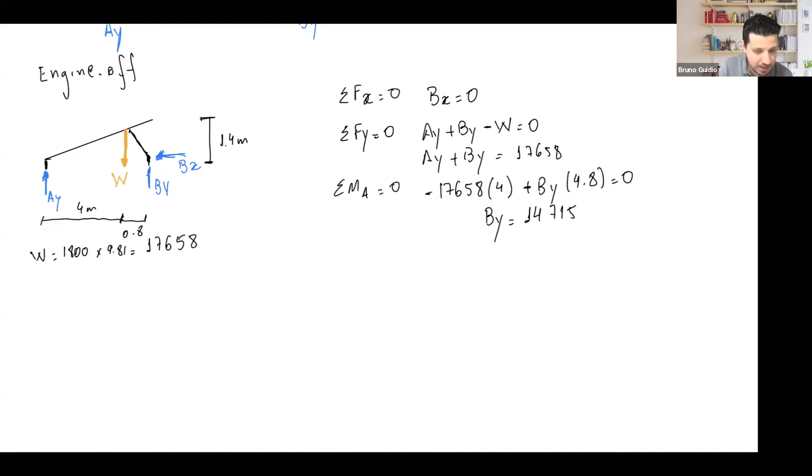That's all the distance to point A. How much is it? Let me calculate this: 17,658 times 4 divided by 4.8, this is going to be BY, which is 14,715 newtons. AY, if this is 14,715 and the total is 17,658, then AY is 2,943 newtons. All right, so this is when the engine is off.

The engine is off, let's see now when the engine is on. What do we have? The same airplane, W here, the same AY. So the engine is on.

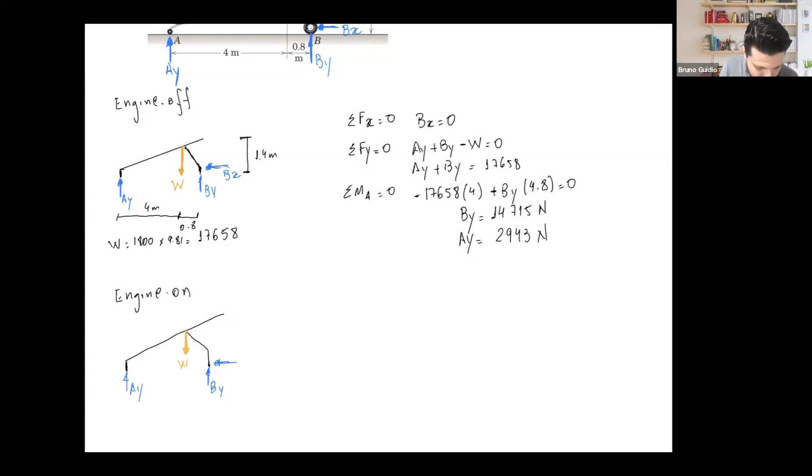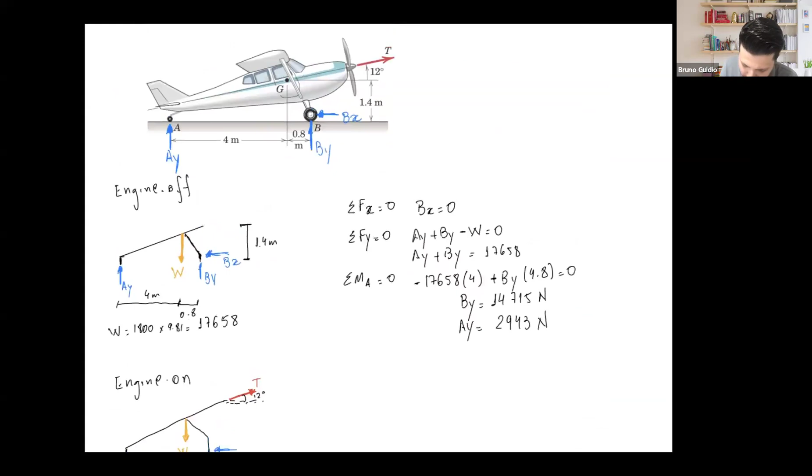Equilibrium is about to move, so let's see how much are those forces about to move. Right here he gave me T, this is 12 degrees, of 3,000 newtons.

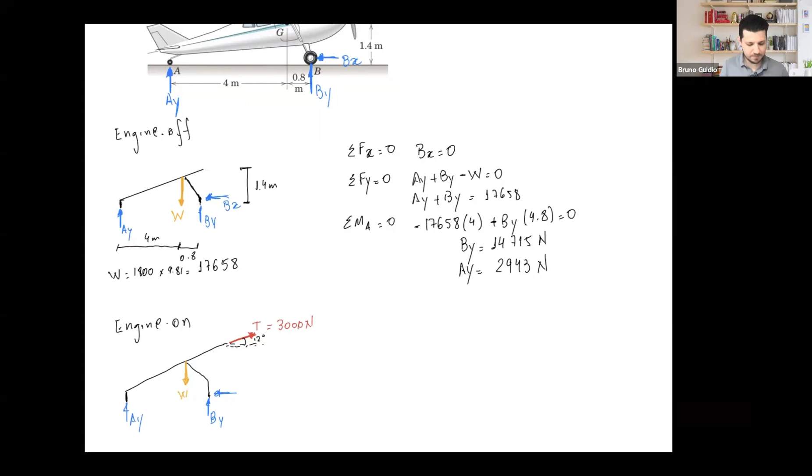Well here, as you can see, 12 degrees, and fixed, it's inclined. So what are we gonna have? T cosine 12, T sine 12. T cosine 12, T sine 12, that's the components.

Now we have some assumption here, not assumption, but you need to understand one thing for this specific problem, so that's why I put it here. Of course, before that, sum of the force in X equal to 0. Now we have BX: T cosine 12 minus BX equals 0, so BX is going to be T cosine 12, which is 3000 cosine 12, equals 2934.44 newtons, easy.

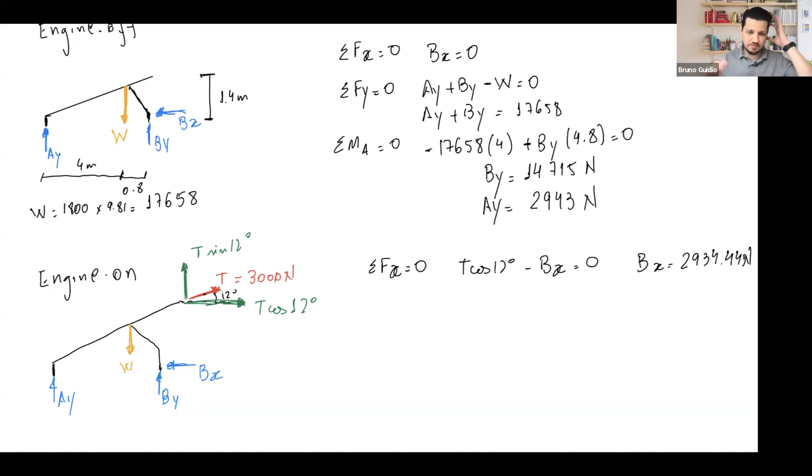All right, here same, sum of the force in Y: AY plus BY minus 17,658, and positive T sine 12. This at the end should be the following: 17,658 minus 3000 sine 12, this would be 17,034.26. Okay, cannot solve, now I have to go to moment.

Moment about a point, moment about a point. Now guys, this is the thing here. When you take a look at this problem right here, you see this T, and you see that the distance that was given to you is 1.4 only. Now the thing is the following: you have the option, of course you have the option.

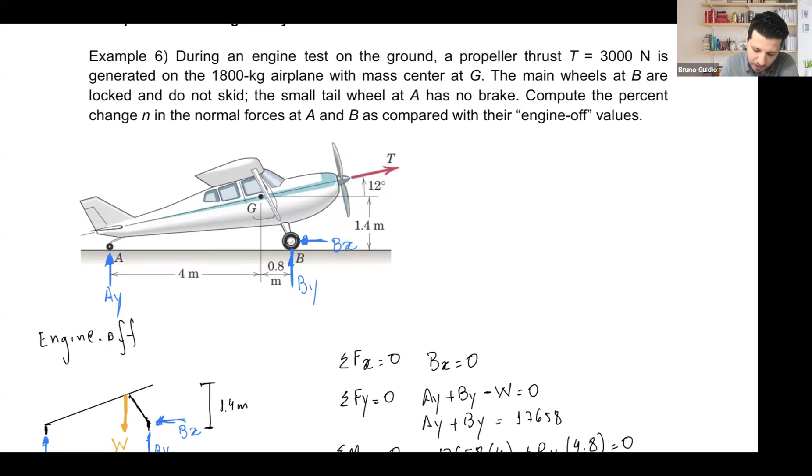Consider this force acting here, force T. What do you have to do now? You have to find all this distance here, meaning what is missing from this 1.4, and also this whole distance here, what is missing from the wheel to that part on the front. You can do that, you can find those distances because components here, components there. However, let me tell you the following.

However, this force T, any force that you can see, what happened? This T is applied at this line of action, right? This line of action, this line of action. Meaning you can move this T all around this line of action, meaning you could put this T acting since in here, since there, and have its components right here and right here.

You could have this T all the way to here and have components acting here and there.

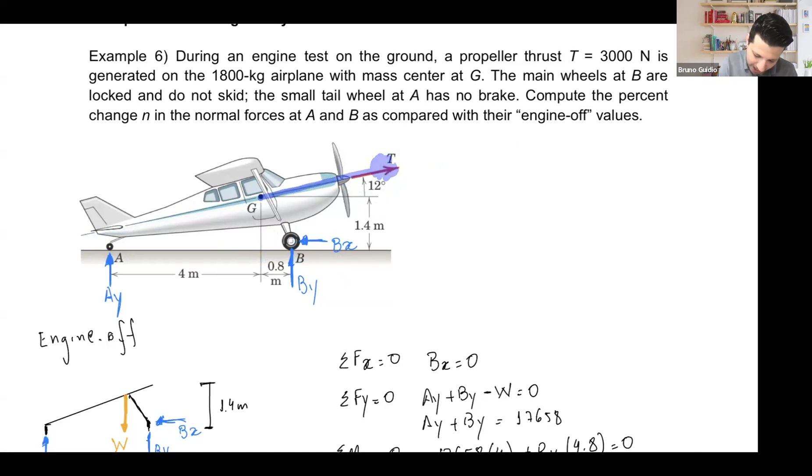Meaning that this force is coming all the way here, and then its components, I'm going to translate. So this is equivalent to this one here that I'm going to draw.

T sine, T cosine, W, By, Bx, Ay. So this is what I'm going to consider here.

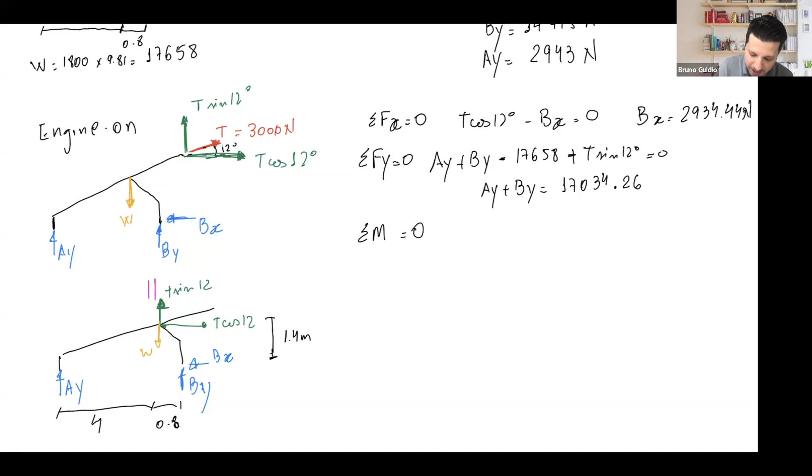Why am I doing that? Because easily I know those distances: this distance is 4, this distance is 0.8, and also I know this distance here is 1.4. That's why I'm moving it. If you calculate this distance, that distance, and the distance that is missing, and do the same calculation of moment about A, you should get the same answer.

Since time is almost done, let me finalize this by summing the moments about A. I have negative 17,658 times 4. What else? Put this first: By times 4.8. What else? Plus T sine of 12 times 4.

And negative T cosine 12 times 1.4 should equal 0. So if I do all of this, let me calculate this with you.

By goes to the other side, the other one goes to the other side. So let me do 17,658 times 4, then T, which is 3,000, sine 12 times 4, then 3,000 cosine 12 times 1.4. Now my By should be this one, so By is going to be 72,245.28, something like that, divided by 4.8.

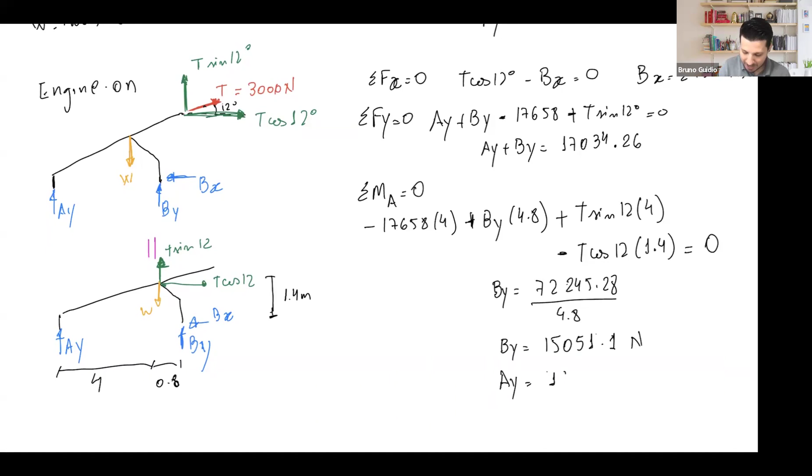So the difference between them, Ay, By, Ay, By, one is engine off, engine on. As you can see, By is going to increase, Ay is going to decrease. So that's the percentage that was asked.

I'm not going to calculate this, forget about this. I want to just stop here with Ay, By, Ay, By, for two different cases. So that's it.

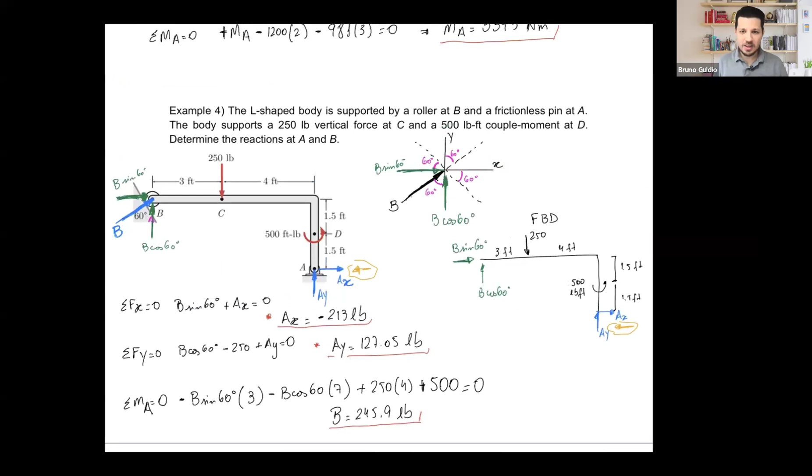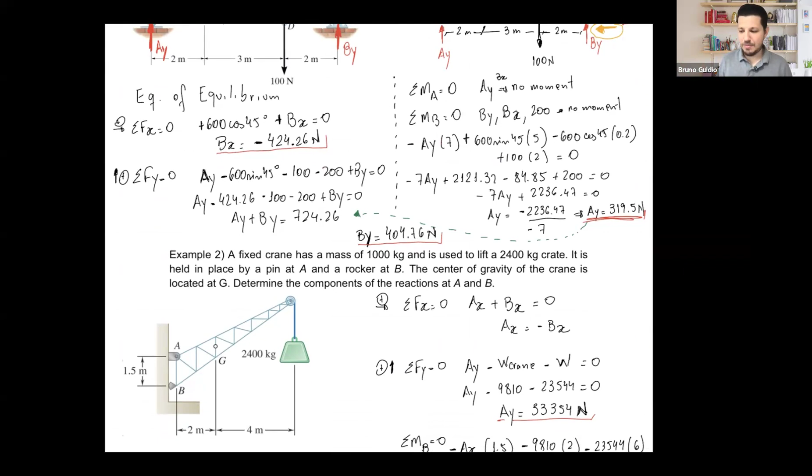Today I used all the hours I had in order to solve as many different problems as possible—6 problems that we solved, with a few assumptions in some of them, some straightforward calculation in others. This is a really important topic for life as engineering: equilibrium equations of a rigid body. All right, if you don't have questions, I'll stop here.